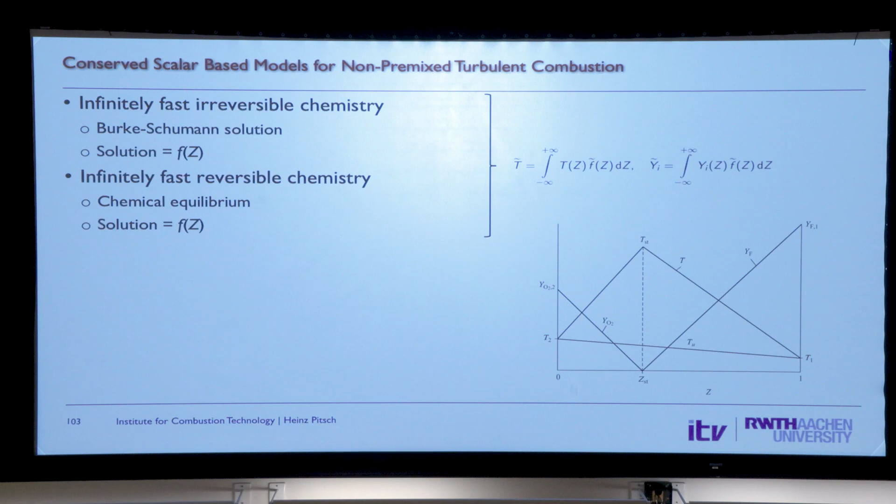Okay, so we're going to talk about models for non-premixed combustion. We just saw we have the beta PDF and we need a model for all scalars as a function of mixture fraction. One option is Burke-Schumann, but that's infinitely fast chemistry. Is there something we can do better?

That brings us to the flamelet models. The flamelet equations we had derived already. The idea is that we assume the chemistry is fast, but not infinitely fast. We don't want to formulate this for very slow chemistry. We want departures from the infinitely fast chemistry limit, but maybe the departures are not too large.

The flame is now not infinitely thin, which you would get for infinitely fast chemistry. The flame should still be thin compared to the small scales of the turbulence, or the inner layer should be thin compared to the small scales of the turbulence. That's very similar to the assumptions we made for the thin reaction zones regime for premixed flames. The inner layer of the flame still retains its laminar structure, and then we can use these laminar flamelet equations to describe this flame structure.

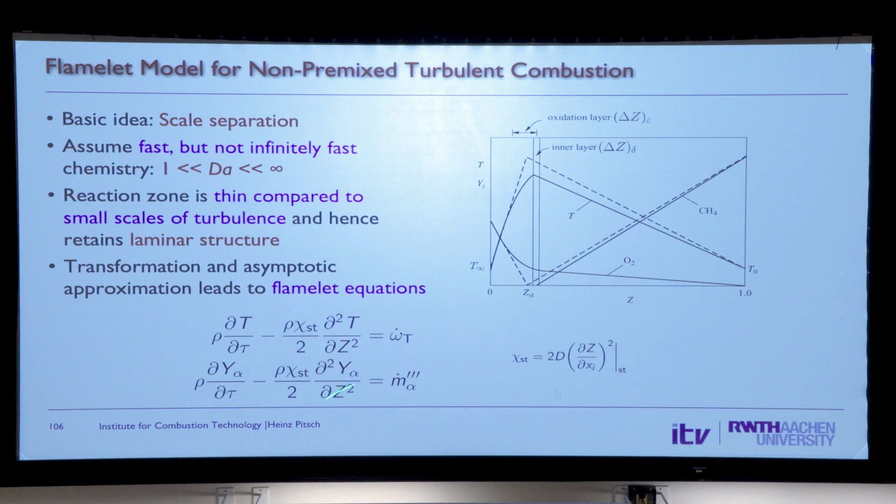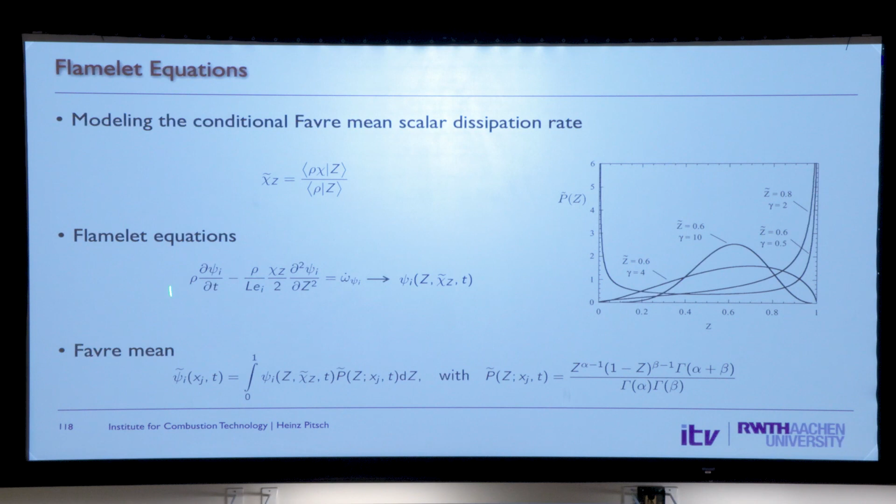Now this shows again how these are derived, but we did this already. So this is the result. Example I showed you also. Here this is the result. So these are the flamelet equations where we actually assumed the Lewis numbers are equal to 1. Here there is a Lewis number, but I want you to think of this as being equal to 1.

And then the only parameter that appears here is the scalar dissipation rate. The scalar dissipation rate can be modeled and can be locally evaluated in a flow field if we want to use this as a model in a code that simulates a turbulent non-premixed combustion case.

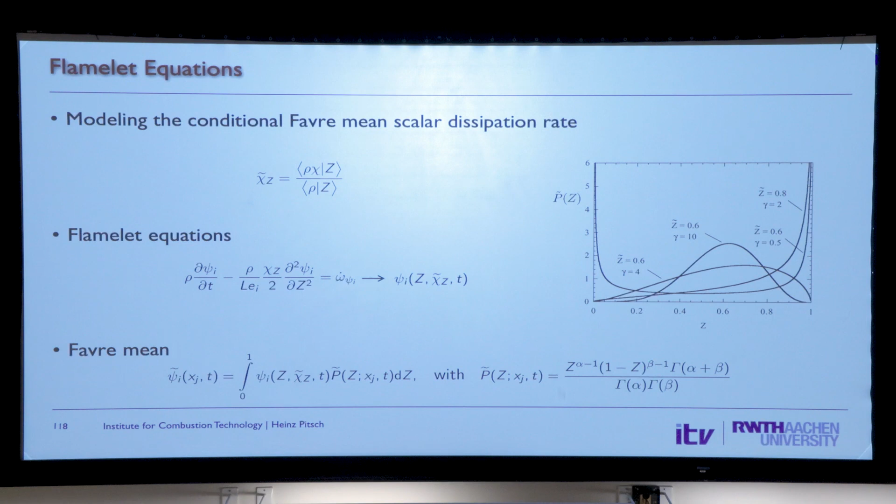So these are the equations, and we can solve these equations, and then we get psi here as a function of mixture fraction and maybe also the dissipation rate. Then we can use an expression like this to determine all mean quantities everywhere, using here the beta function.

So this is a model we have used, for example, to do simulations of unsteady combustion cases, like simulation of combustion in a diesel engine. We said earlier in a diesel engine you have the piston go up and compress just air, and then when the piston is all the way up, you inject liquid fuel, and that fuel then evaporates and ignites and so on.

This was actually my PhD thesis, developing this model for diesel engines. And the way it works, I just show it here because it's nice the way it works.

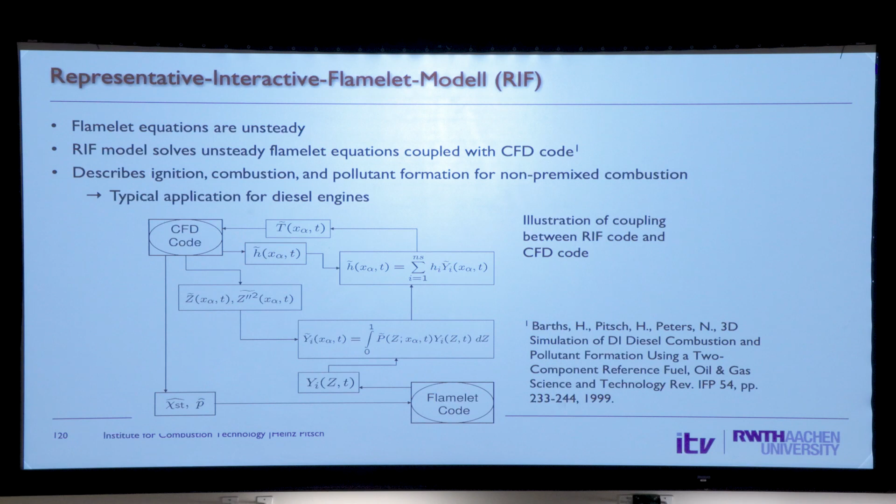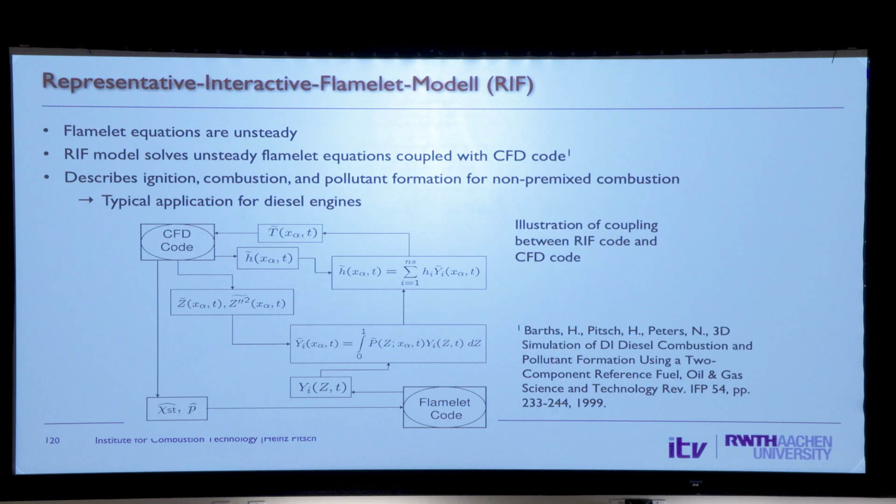We have a CFD code, and in the CFD code we have the Navier-Stokes equations, and then also we have a mixture fraction equation. We can solve these if we know the density. If I know the mean density, I can solve the Navier-Stokes equation, so I need the mean density. I'm also interested, maybe not even in the temperature, but I'm interested in pollutants also.

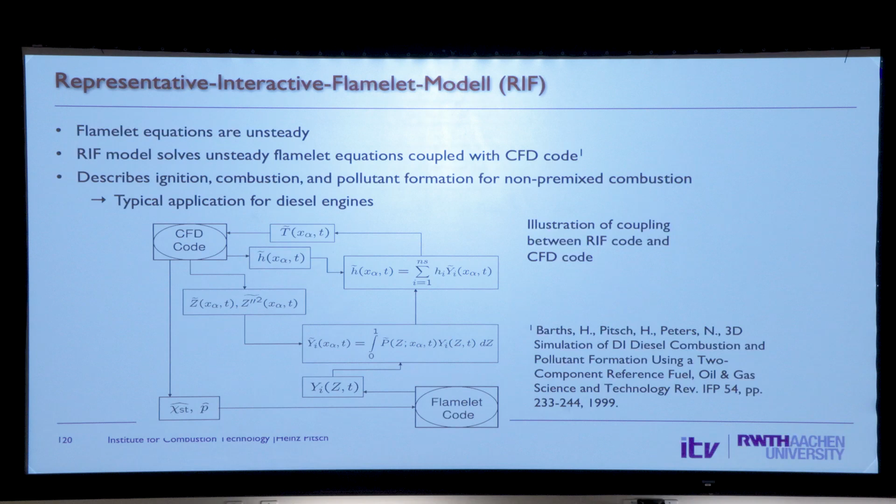So we have the CFD code. The CFD code solves the equations from n to n plus 1. And then locally we get quantities like the pressure. We have even the background pressure, which changes because the piston goes up and down, and during combustion also the mean pressure goes up.

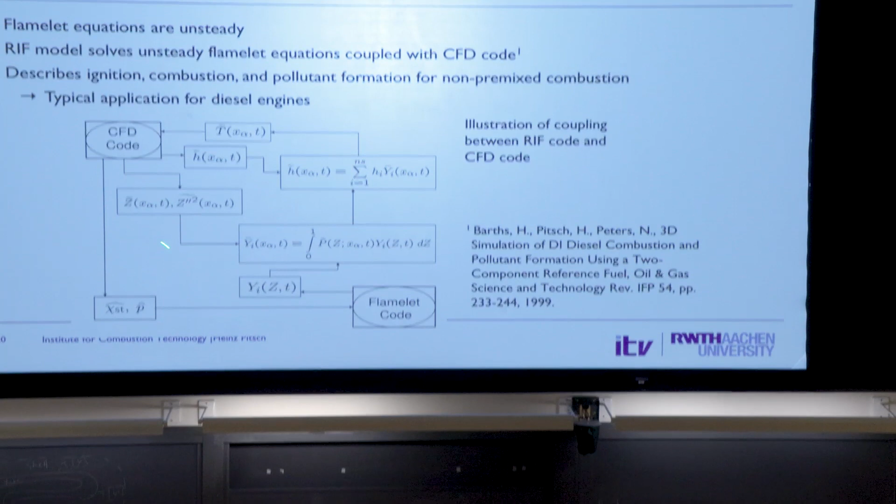And then also I can locally determine, I use a K epsilon model. I have K, I have locally the value of K epsilon, and I have the variance of mixture fraction that gives me also the dissipation rate. So I get these in each cell, and then we take an average, so that's what the hat says, of the stoichiometric dissipation rate over the entire domain, inside the cylinder. That's a little bit the trick here.

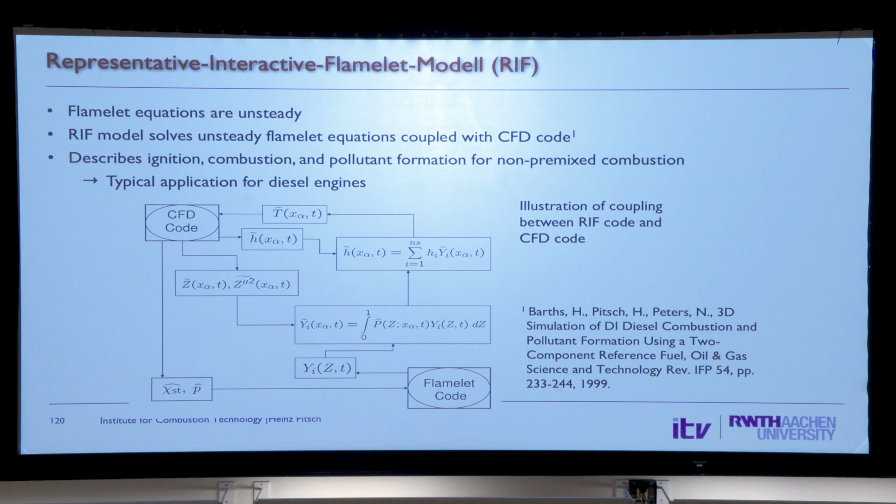And then I have a dissipation rate at time step n+1. This was solved for n to n+1. Now I can also solve the flamelet equations from n to n+1 because I know the pressure and I know the dissipation rate for that time. That gives me then the mass fractions at this time step n+1. I know the mean and the variance of the mixture fraction here from the CFD solution, and that gives me the PDF.

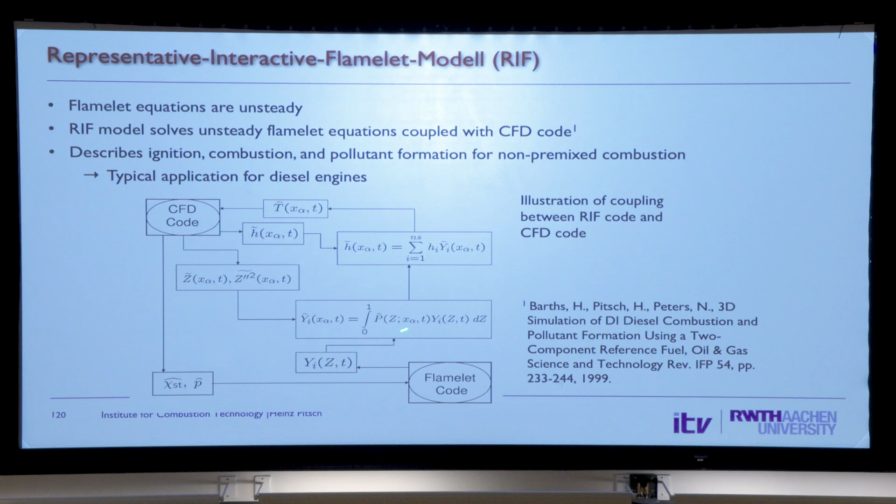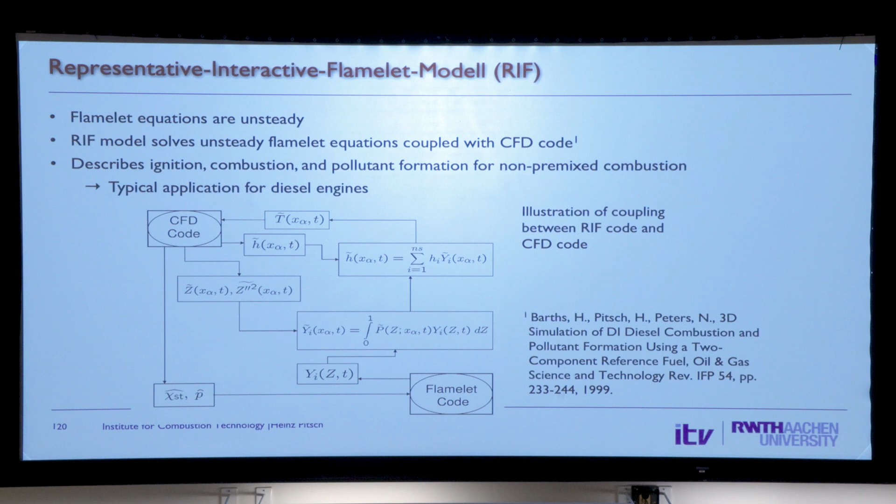I have now from the flamelet code these mass fractions, and I can get the mean quantities everywhere—here is the mean and the variance. Then we actually solve an equation for the enthalpy, and knowing the enthalpy everywhere and the mass fractions everywhere, I can determine the temperature from this, and the temperature gives me the density, and then I can solve the CFD code for the next time step.

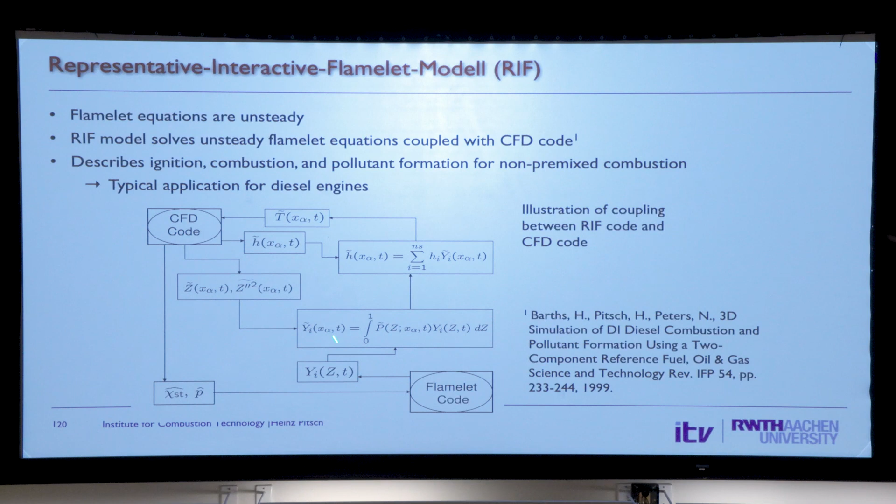So this solution always goes back and forth between these two codes, and everything is done online, which is why it is called interactive—we call this the interactive flamelet model because it's solved online.

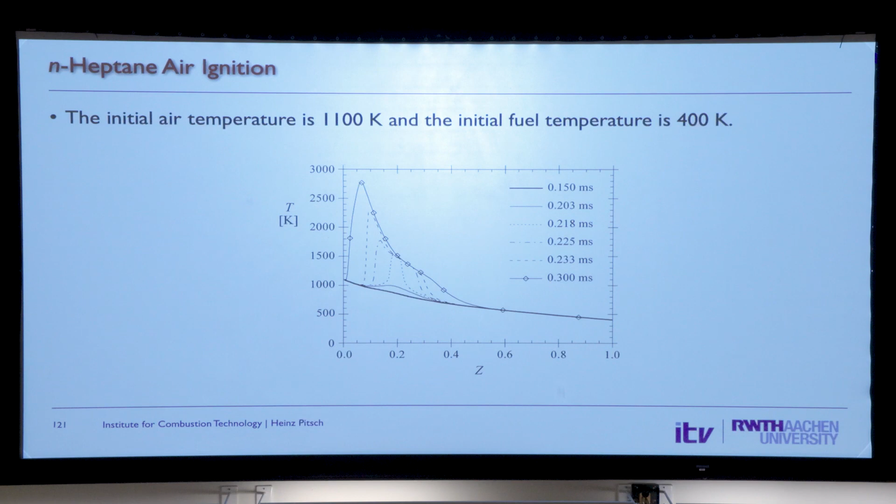And then we can use this solution here always as a function of time. This shows the results, and maybe I don't need to discuss the results very much. Actually, this shows a few more examples—so this was this model, which was developed a long time ago.

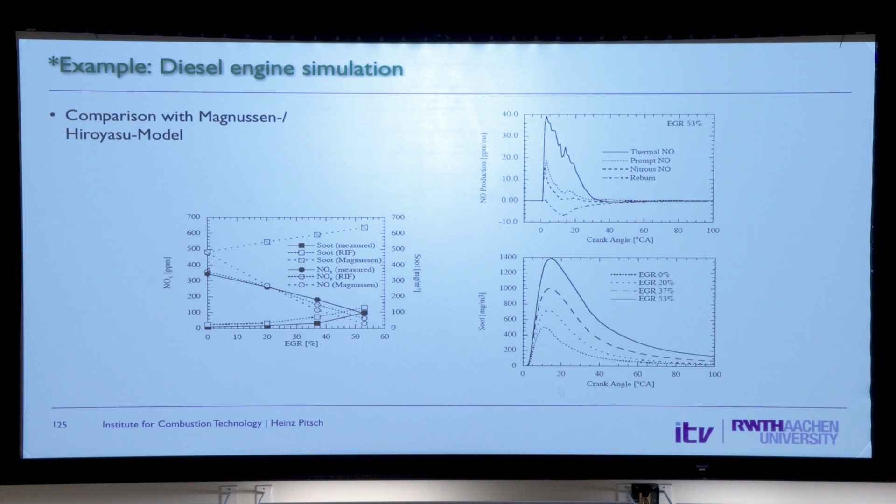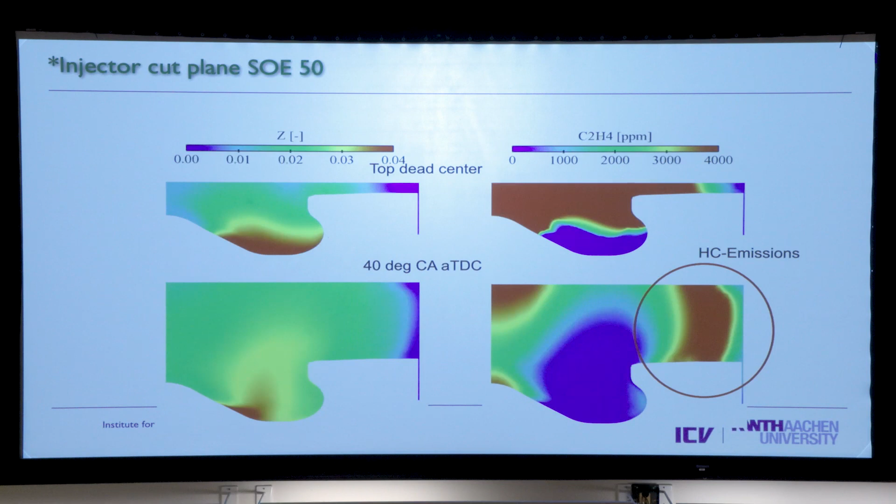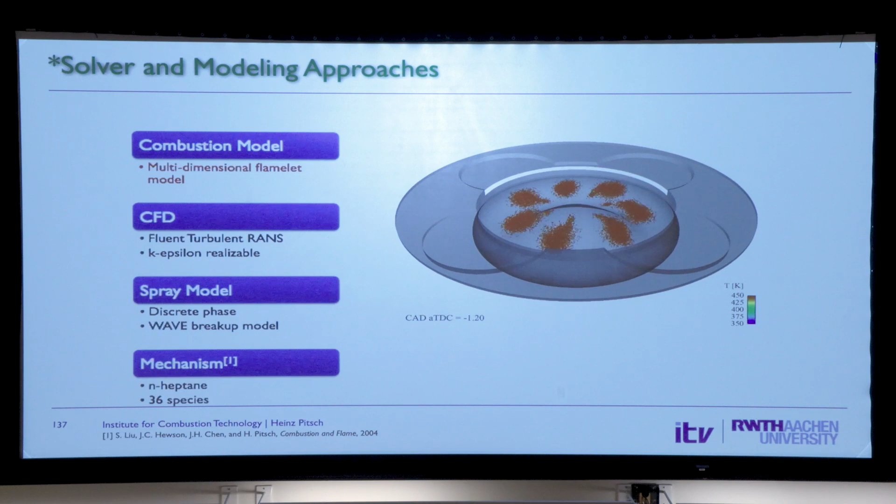And then it shows here examples of an engine that until recently we ran in our lab, and we have also extended these models, making them a little more complex for multi-feed, for multiple injections, and so on. So the examples shown here, I just show because it's a video—let's see this again. You have injection of liquid fuel, then evaporation, then a second injection, and then you get combustion.

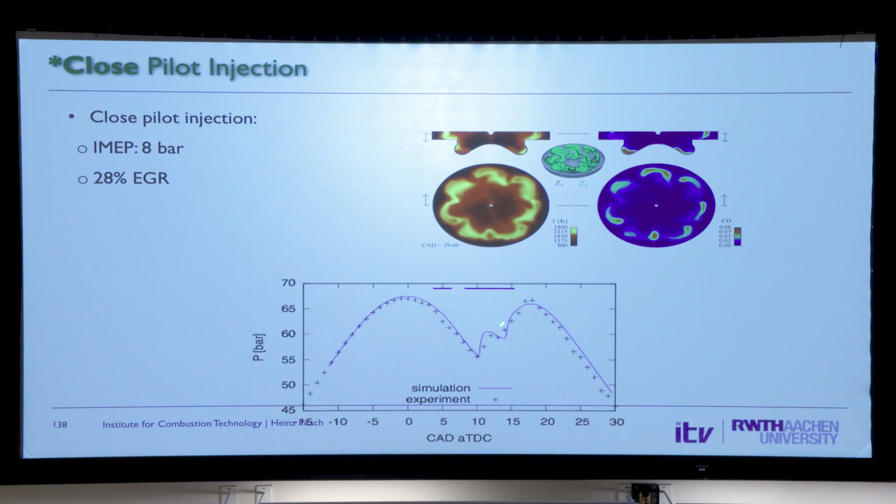And this shows the scalars here, for example CO—you see how CO proceeds. And then here's the pressure, and you see pressure goes up and down. Here's the injection, and then a little later you get ignition of this first part of the injection. Then a little later, you get ignition of the second part of the injection—that's why you get these two little humps here. So, things like this.

Okay, so that's an unsteady flamelet model. Now the flamelet model—this model—is available in, I think, most commercial codes, and can be used as a model for like a diesel engine combustion. But mostly the flamelet model was used, or is used, in a form called a steady flamelet model. That makes for a very nice model that can often be used for non-premixed combustion simulations.

Here again we start with a flamelet equation for temperature and mass fraction, and then we assume the flame structure is in steady state. What does that mean? There are parameters—this is a time-dependent equation, and it will always try to go to a stationary state, right? It will always try to go to equilibrium, and it will reach that equilibrium at some point, and then nothing changes anymore, unless you change a parameter.

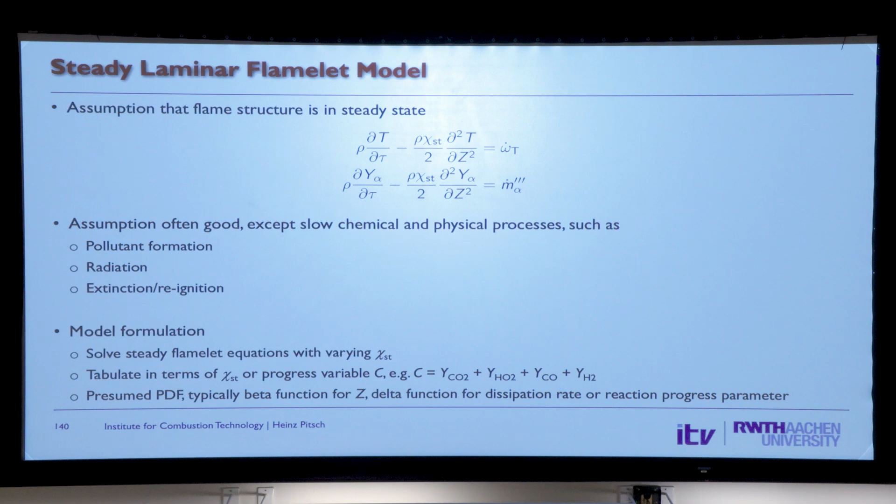So you change the dissipation rate, or you change the pressure—these are parameters that influence this equation. But let's say we are interested in a stationary turbulent jet flame. It's ambient pressure, so the pressure doesn't change.

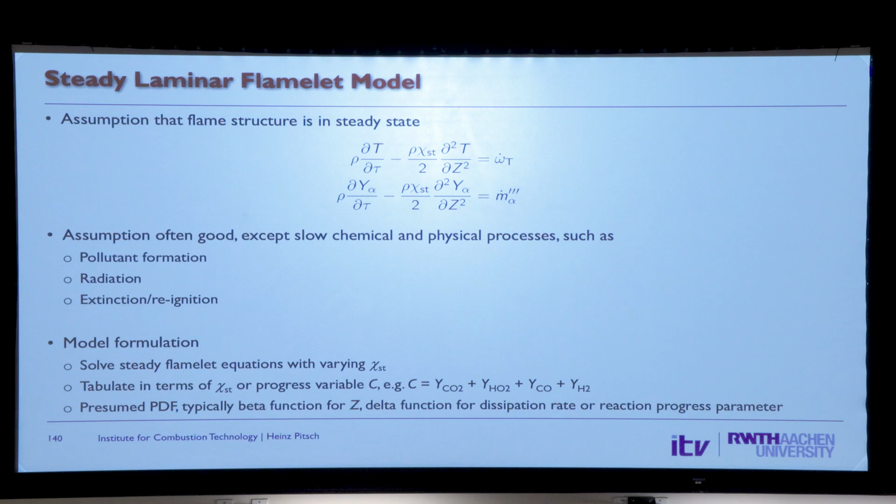And the dissipation rate changes all the time—it changes when you go downstream; it's actually very high close to the nozzle because it reflects the local gradients, which are very high close to the nozzle, and they decay strongly downstream. In the jet, the dissipation rate on the center line goes with x to the minus 4, and along stoichiometric mixture it goes with x to the minus 2. So it strongly decays when you go downstream, and that changes here.

But still we say the equilibrium is reached fast compared with the changes of the parameter, and so the flame structure is in steady state. That makes for a very nice model, because if the time dependence here is zero, and the pressure is constant, then the dissipation rate is the only parameter that influences the solution.

What we do is solve these equations for any possible value of dissipation rate, and we get a solution of temperature and mass fraction as a function of dissipation rate and mixture fraction, and we put that in the table. Doing a simulation, we just look up the table and use the presumed beta PDF.

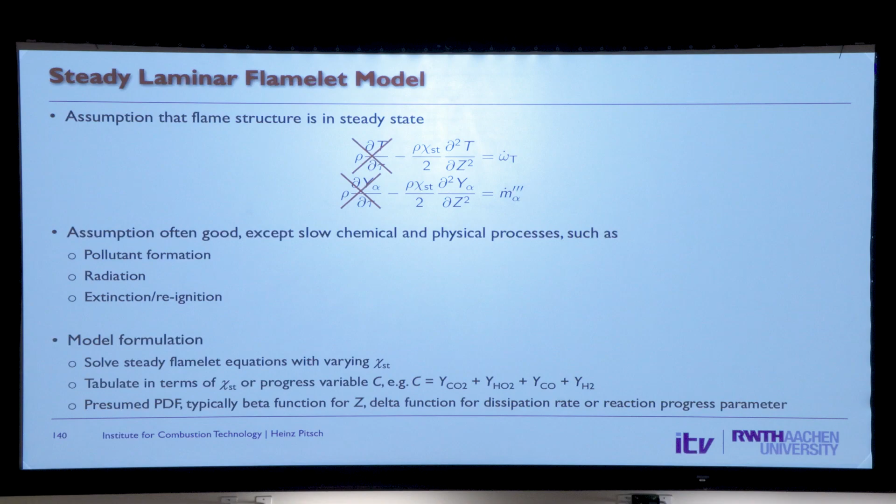The tabulation can be done in terms of mixture fraction and dissipation rate, but instead of dissipation rate, sometimes we introduce a progress variable, and then it's done in terms of mixture fraction and progress variable. Now you have the solution, let's say temperature in terms of mixture fraction and progress variable.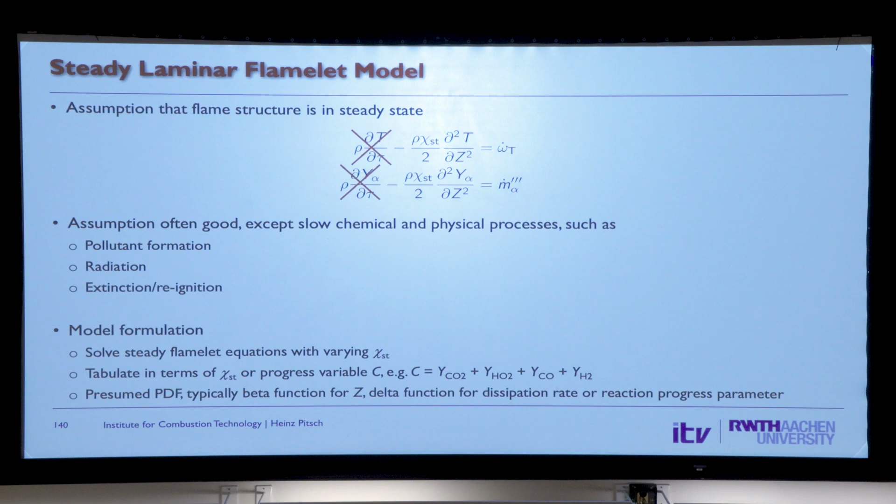I know the beta PDF depends only on the mean and the variance of mixture fraction. So I can do this integration of y of z times PDF of z, which gives me the mean, for all possible combinations of mean and variance of mixture fraction. Then I get the mean as a function of the mean mixture fraction, the mixture fraction variance, and the dissipation rate.

That gives me a three-dimensional table, and in the simulation, in one cell, I would look at what is the dissipation rate, or stoichiometric dissipation rate, what's the mean and variance of the mixture fraction, and go into my table to look up the mean density, the mean temperature, and whatever else.

So that's the steady flamelet model, relatively simple and also available in many codes. The drawback is you need to always generate this flamelet table first, but once that is done, one can do these simulations.

This here is an example, a simulation we did a long time ago - the bluff body stabilized flame. The white surface here is just a solid body, and you have air outside, and the little black spot in the center is the fuel nozzle.

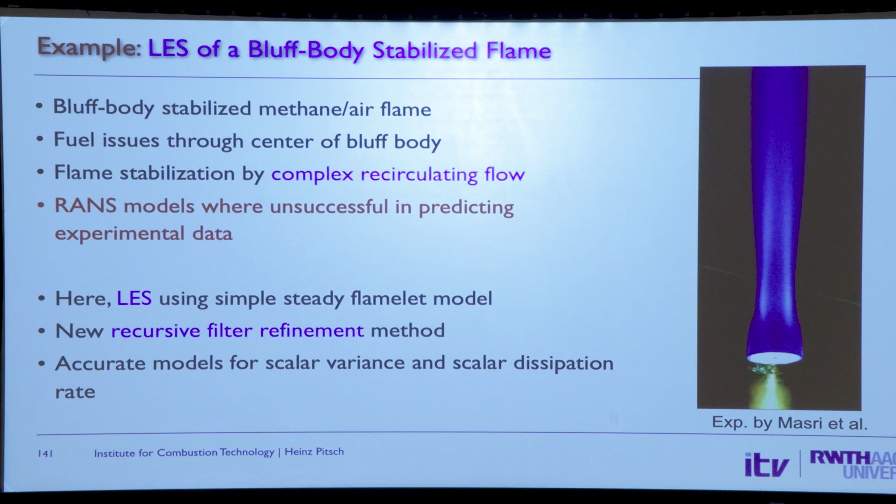So you get a recirculation region close to the flame, and this is how the simulation looks like. You see this recirculation here. This one also we had in blue and red, and you could see it in 3D.

This compares temperature and CO close to the nozzle and far downstream. Close to the nozzle means in this recirculation zone, and then far downstream. You see it's very good.

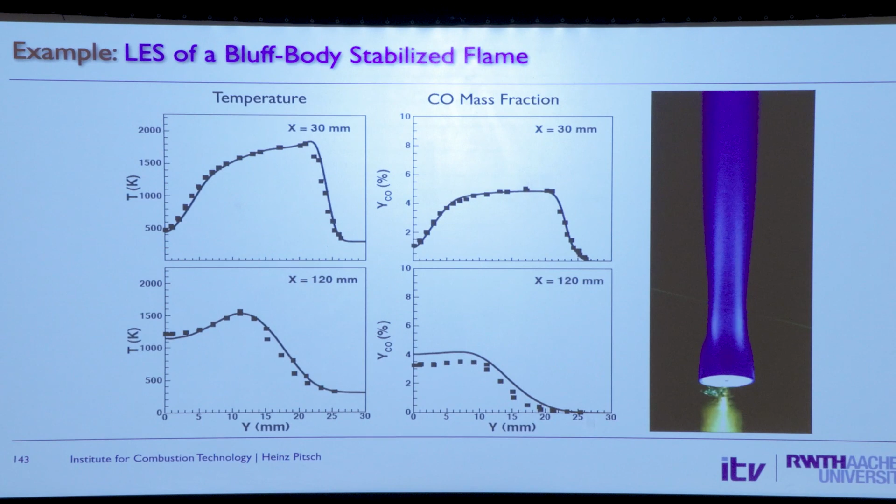At the time, it was interesting - a lot of people tried to do simulations for this, and most models either predict what happens close to the nozzle or what happens downstream, but not both at the same time. This predicts both. Why? Because it was LES, and LES is much better capable of describing these more complex flow physics.

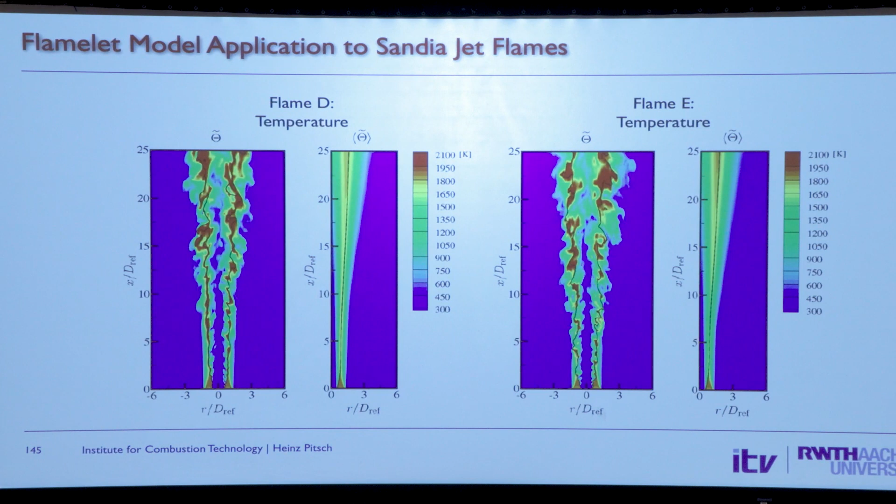We also looked at cases that have local extinction. I said this is not really meant for cases where you have local extinction, but we have extended these models in a way where this is then possible.

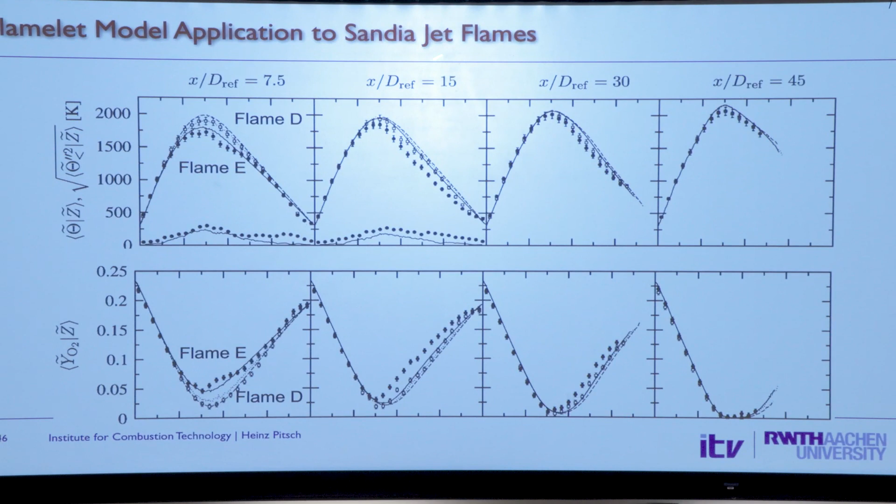You see here, these are the Sandia jet flames. They're very famous, very often used for validation. Here you have oxygen mass fraction, and you have air on this side, but the fuel also has some oxygen.

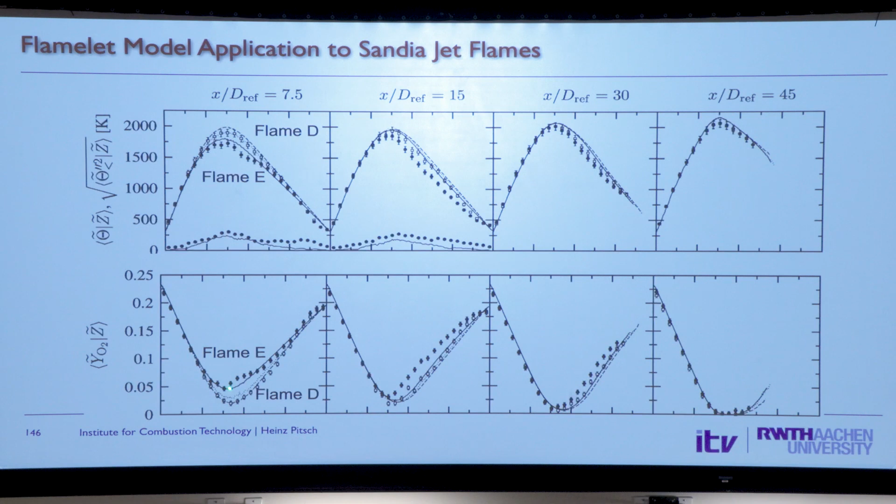This is why you have oxygen on both sides, and actually at stoichiometric it should go to 0. The reason it's not 0 is because of local extinction events, which leave over some of the oxygen - this is close to the nozzle. If you go downstream, at some point the oxygen is fully consumed.

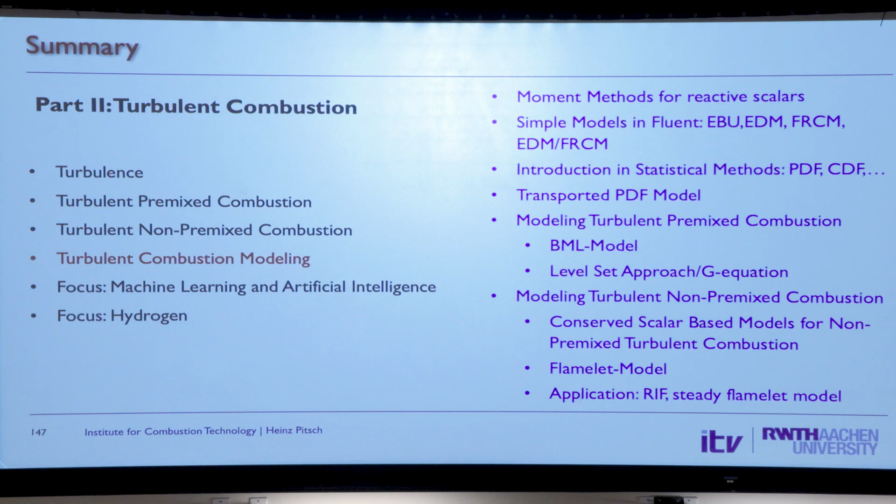These are just a few examples for applications of these models. What I showed you now is just models for the simplest cases. There are more complex cases where the simple version of the model is not applicable, but people have come up with ways to deal with these also.

The nice thing about a flamelet model is it's a true multi-scale model. True multi-scale means it starts really from the local flame structure - it looks at what the local flame structure is, and then averages over the local flame structures, rather than first averaging and then getting an equation for the mean. Because it's a multi-scale model, it can really tell you the difference between local states - the non-linearity that you get for local states.

So, for example, I have a certain local dissipation rate, and everything burns fine, and then I increase this dissipation rate a little bit, and it extinguishes. That is very hard to describe in a mean sense if you just have a moment equation, but it's much easier to describe with a multi-scale model. The multi-scale model then has the disadvantage that it's sometimes a little hard to formulate for complex cases. So that's the disadvantage of this model.

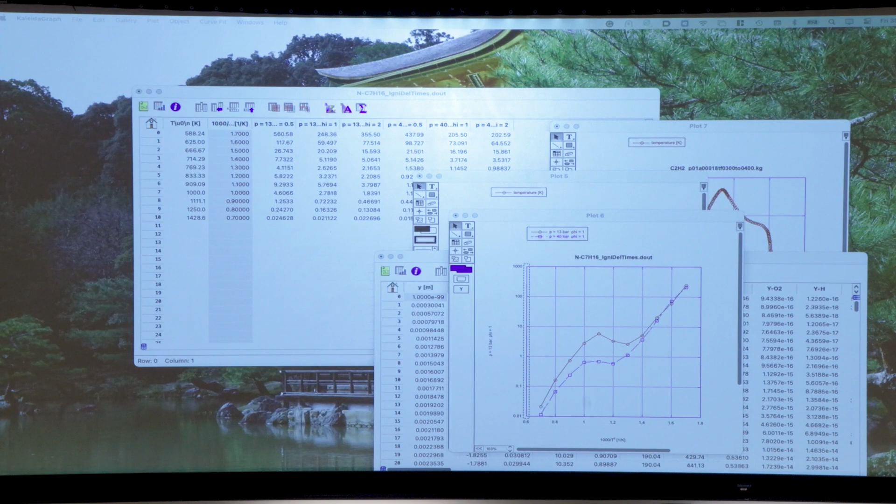Okay, so let's go to the next topic. Now we have two, I call these focus topics. One is on machine learning, and the other one is on hydrogen, as I mentioned. Okay, so let's start with machine learning.

Maybe I'll skip over some of these things because they're not so important, or maybe a little too much detail. But anyway, people talk about artificial intelligence, machine learning, data-driven approaches, and so on. It's not all the same.

Here you see artificial intelligence is a very wide field, and machine learning is one subset of this, where we try to learn with experience. We try to use data for the machine to learn something, and of course more data typically improves these algorithms. Examples for machine learning are often used here for recognition, language processing, and so on. People use it for image recognition, and people use it for ChatGPT, you all know, for language, which is a language model. So they're very, very smart algorithms which just learn from data.

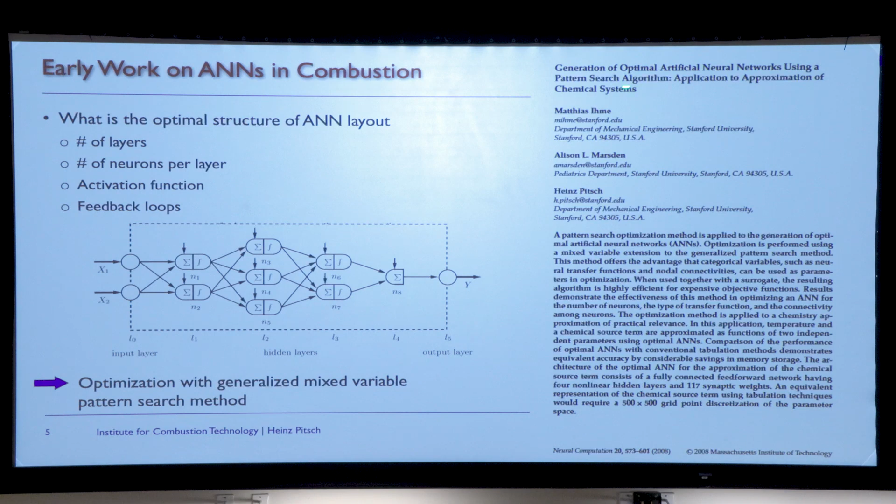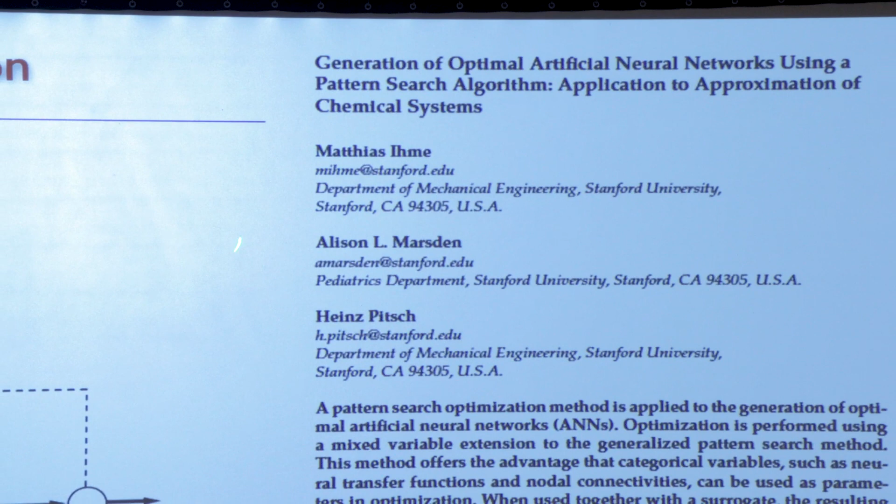Now, is this new? No, it's not new. This is a paper that we published with my former student, Matthias Ihme, and with Alison Marsden - interestingly, I just realized both of them are now professors at Stanford. So doing machine learning early on gets you somewhere somehow. This is a paper we published 15 years ago, a long time ago, and we're not the only ones who did machine learning, artificial neural networks at the time.

So what we did in this paper is address a question you should ask - I showed you how a neural network looks like, but how many layers should I use? How many neurons should I use per layer? What connectivity should I use? All these are questions. The weights are determined in the training, that's really what you determine during the training, but what should be the structure of this?

So we developed an optimization algorithm that optimizes the structure of this to give you the best performance of the network. Of course now it's very well known how to do this.

You see here, for example, temperature: one is using a flamelet table, here a very fine flamelet table, very accurate, shown in blue, and the ANN is the red line. So it wasn't very accurate.

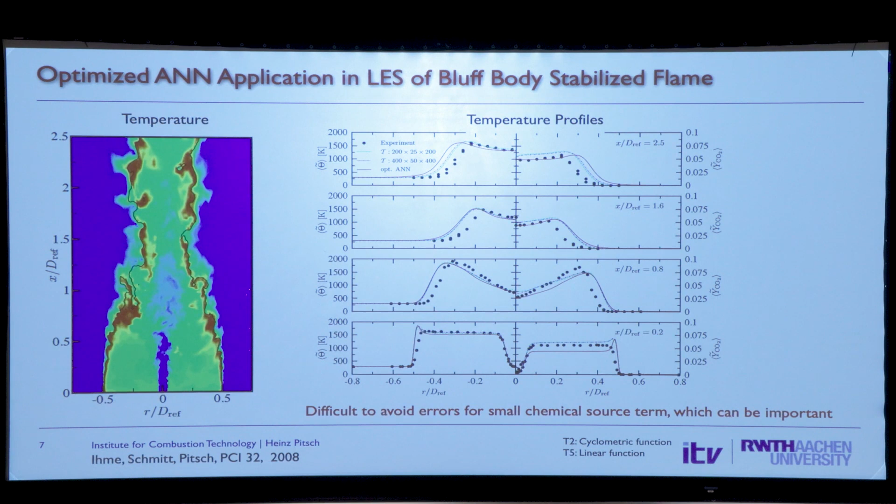We analyzed this and figured out why. It turned out sometimes the chemical source term is really, really small, and then the network says this is not very important. But it is sometimes very important, even very small source terms. So we couldn't figure out how to make this very accurate.

So that's why we gave up at the time. We thought it's not very useful.

But now, why is artificial intelligence, or these neural networks, becoming more popular? Because now so many people are interested in this, and companies are interested in this, and develop these toolboxes and techniques that you can use.

For example, everything at that time, Matthias had to code up manually. Now you just use Keras or whatever toolbox, and it's 5 lines and you get your network. It's very, very easy to do this now.

But what's even more important is that things like overfitting, or how to get networks with really good accuracy - there's a procedure now where we know exactly how to do this, and there are special tools or special tricks that we didn't know at the time, we didn't have at the time. Which now everyone knows, so it's much easier here.

For example, it doesn't say it here, but these dropout layers or regularization, these techniques that we use now, we didn't have at the time.

And then also, of course, now more complex ways have come out: convolutional networks, generative networks, reinforcement learning, all of this. People are looking at different techniques and trying to make something out of it.

There are certain ways to avoid overfitting. One is these dropout layers, where during training there's a certain probability that you don't use a neuron at all. So the network has to give you good results with or without this neuron. Usually when the network overfits, one neuron becomes responsible for one data point, and another neuron for another data point. By eliminating some neurons during training, there's not one neuron responsible for one data point, which leads to better training.

Then there's regularization. If the network wants to assign one neuron to one data point, it typically leads to very large weights for these neurons. Regularization means the weights can't be very, very large. There's a regularization term that keeps them the same size, or penalizes large weights, and that also helps. So these are just two examples of techniques that help avoid overfitting. There are many others also.

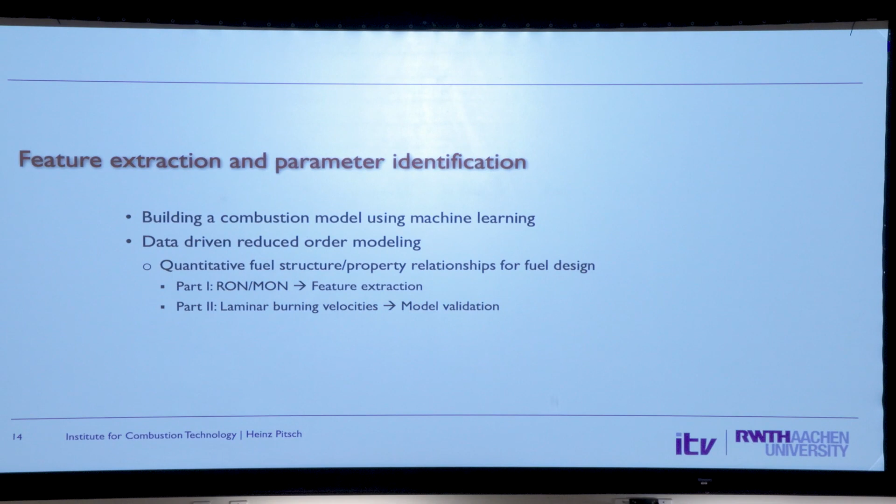This means it's very important to choose the right parameters as input. That's what we call feature extraction. The question is, what are the correct input parameters? And that, in modeling, is of course always a big issue.

This is a technique we've been using for a long time, which has nothing to do, in a way, with artificial neural networks - a technique to do feature extraction. We call this the optimal estimator technique. It's something we always use in modeling, where we have data and try to understand what parameters to use for a model. Now what is modeling? We said this yesterday - modeling means expressing unknown quantities in terms of known quantities.

The known quantities are the inputs in a model, and the model should give me as output some other quantity I need to know. Modeling has two steps: the first is I need to choose the parameters I use in my model, and the second is, once I have the parameters, what's the functional form. And here's an example.

We said eddy viscosity - this is a quantity we need to know - in LES, the subfilter Reynolds stress. And this is the eddy viscosity model, where we have an eddy viscosity and the strain tensor. Then the Smagorinsky model says the eddy viscosity is given from the strain rate, or the magnitude of the rate of strain tensor.

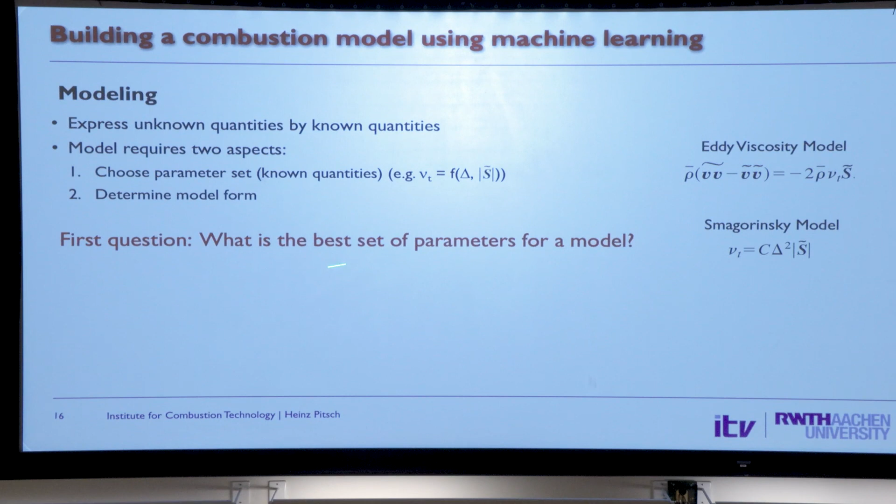So what are the input parameters in this particular case? They are the elements of the strain tensor - so I have 6 input parameters here. This doesn't come independent of it. And the question is, are these the right input parameters? Instead of the rate of strain, I could also use kinetic energy, or something else. So that's the question - what's the best set of parameters for a model? And that's what we want to find out using this optimal estimator technique.

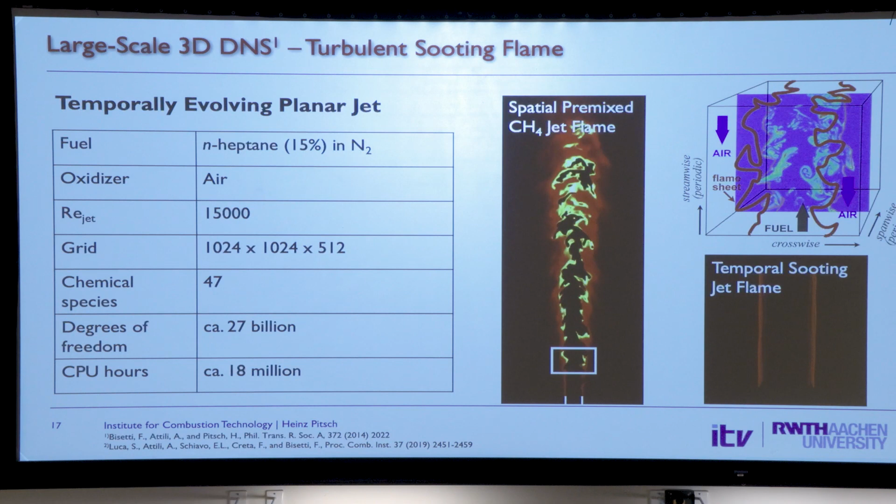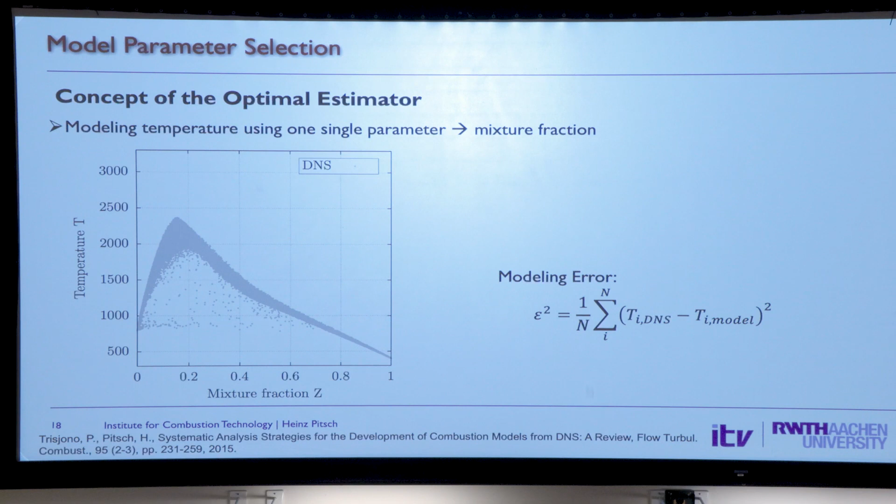This shows an example. We have a data set - doesn't matter what the data set is. We're interested here in soot formation, using a temporal sooting jet flame, and you see some parameters here, but again it doesn't really matter. Before we look at soot, we look at just temperature. This shows, from the DNS, the temperature at each point as a function of mixture fraction - for each point we just take the temperature and mixture fraction and plot it in this 2-dimensional space.

Now we want to develop a model where we have only one parameter, and that parameter here is mixture fraction. I can think of different ways to do this - the first one...

I can think of different ways to do this, and then assess them by defining a modeling error, which is just the L2 norm between the DNS and the model. So I can think of different models. The first one is Burke-Schumann, which we did before. It looks like this, and it's not totally wrong—it has the right behavior, but quantitatively it's not very good. If I evaluate this model error, I get a mean error of 180 Kelvin.

A second model I can think of is to take a flamelet, but only one flamelet with a scalar dissipation rate of 10 per second. That's the red line here, and you see this is much better—you visually see it's much better. If I determine the error again, it's only 50 Kelvin.

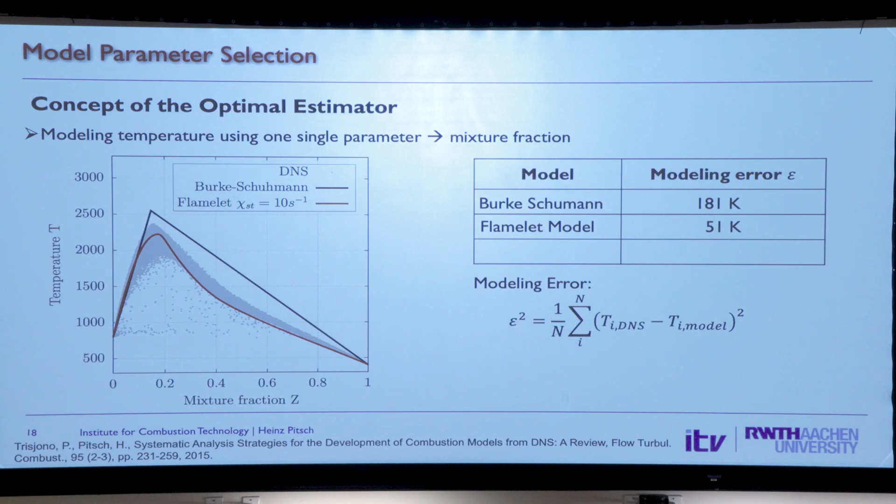Then I could ask: what's the best possible model I could determine given that data? For this set of data, what is the best possible model? It's easy—I have epsilon as this right-hand side, and if we want to know the best possible model, it's just a minimization of the error.

You differentiate the epsilon by the T-model and set that equal to zero. That gives you a minimum of the error. If you do this for a given value of mixture fraction, you'll see this is the conditional mean—for a given mixture fraction value, that's the minimum error you can have. Just take the derivative of this with respect to t-model, set it equal to zero, and it gives you exactly the best model with the lowest error. The best model with the lowest error is the conditional mean, and if you look at the conditional mean here, it gives you this.

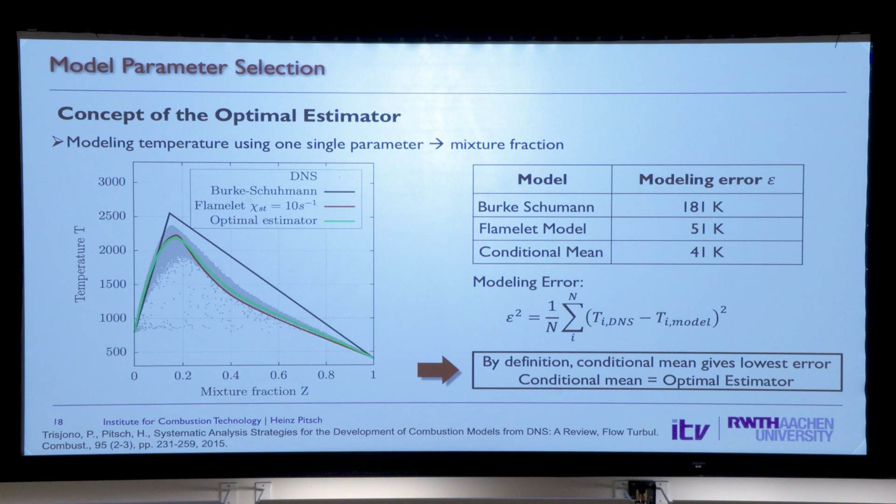That's what we call the optimal estimator. The optimal estimator is just a conditional mean, and whatever I do—if I have only this one parameter, mixture fraction—if I fix this parameter, that's the minimum error I can have. It cannot get better. I've just shown this is the minimum.

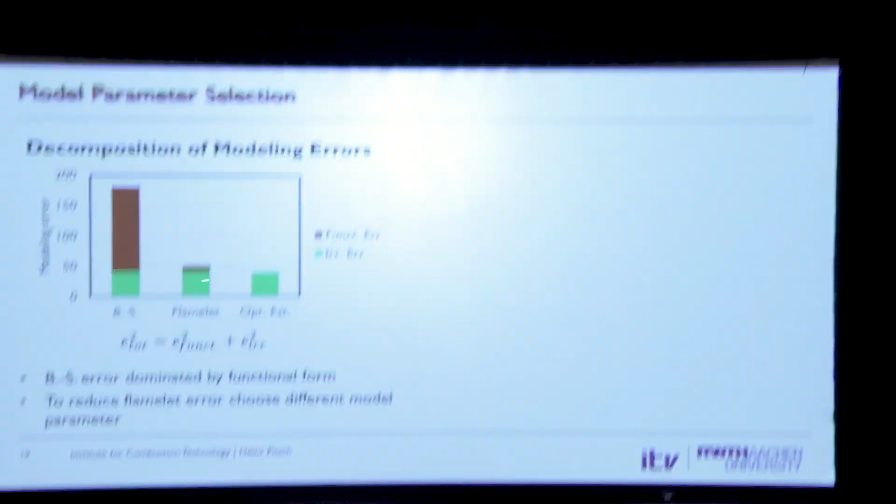So I can look at the error again: Burke-Schumann, Flamelet, optimal estimator. The optimal estimator has a certain error, and it cannot be smaller than this. So the Flamelet model had an error of 50 Kelvin, but 40 of this was just from picking the parameter, and the functional form only accounts for a little bit—it's almost the best I can do with this parameter. With Burke-Schumann, most of the error comes from the functional form.

That puts you in a position to ask what are the best parameters. Because no matter what the functional form is—I don't even know what the model is—if I just say mixture fraction is my parameter, you cannot get better than 40 Kelvin. So now I can test different parameters and see what's the smallest error I could get with this set of parameters.

For example, if I have no parameter, I just use a constant temperature as my model—this is the optimal estimator, and we call this the irreducible error. Once you pick the parameter, you cannot reduce the error any further. That was 40 if I just have mixture fraction. Let's say I use the local velocity as a parameter instead—that's stupid, but it's almost like having no parameter at all.

But if I use the mixture fraction and dissipation rate, it gets better. And if I also add velocity, it does not get better. So if this is the accuracy I want, I need to use mixture fraction and dissipation rate. If I'm fine with 40, I don't even need the dissipation rate.

So for any model, if you have a data set, you can do this analysis to determine the irreducible error for many different parameter sets, and then see which one is low enough.

We did this here for soot. This is the PDF of soot in these little areas. We want to model this PDF, describing it with the mean, which is the first moment, or the first and second moment, giving the variance, or the third moment. This is a skewed PDF, so you need some skewness—the third moment should help, then fourth, fifth moment, and so on. That's what's shown here.

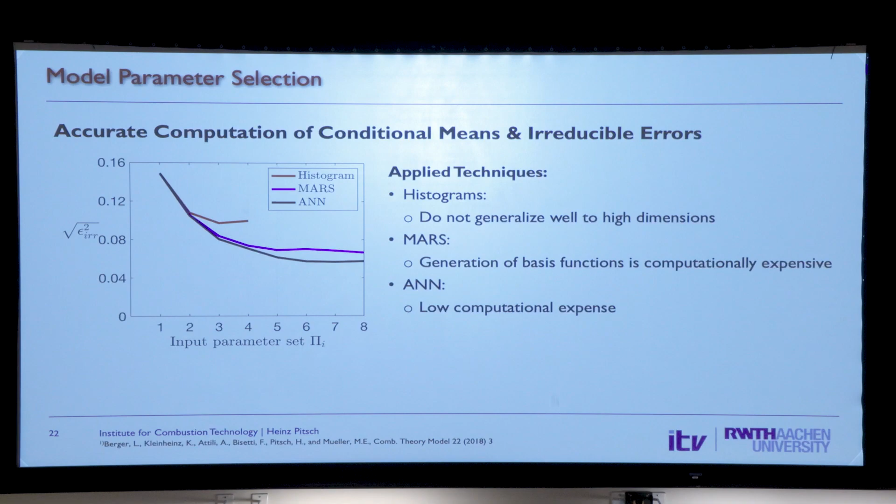I'll skip over this. The two lessons we learned here: what's interesting is this—I would have naively thought that if I have a PDF and I have the first moment, the second moment, the third, all the way to infinite moments, I can exactly determine the PDF. It's not true. It depends on what moments you have. I didn't know this until we ran into this problem.

The second lesson we learned is the optimal estimator is the conditional mean, and evaluating the conditional mean in high dimensions is difficult. In the temperature example earlier, with only one parameter, it's a one-dimensional space. With two parameters, it's a two-dimensional space, and I need to do the conditional average in 2 dimensions. With 3, 4, 5 parameters, I have a 5-dimensional space. Even with a big DNS with millions of data points, when we do binning, we only get about 20 points per bin in 4 dimensions, which means it's not very accurate, and that creates a problem.

So we developed a technique where we use an artificial neural network to represent the conditional mean, and that was much better. So that's one example of a data-driven technique that we use very often in modeling, especially when we have DNS data.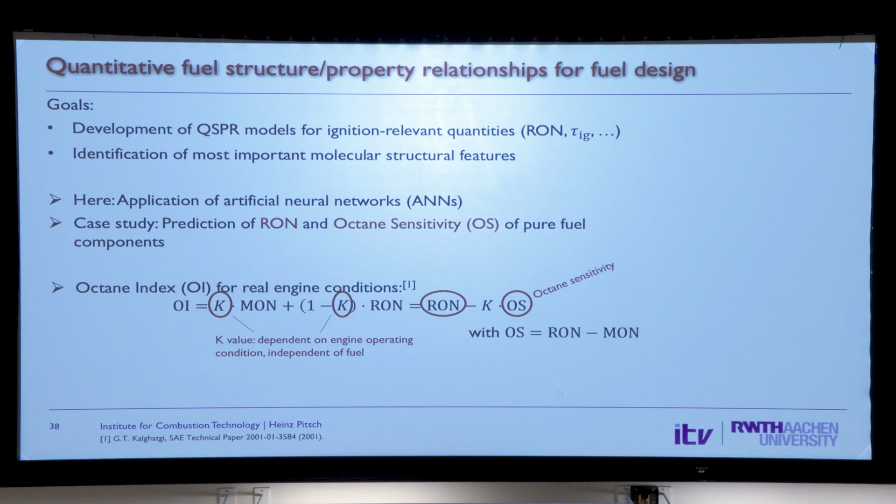Here are a few examples of artificial neural networks that we used in supervised learning to predict fuel properties we're interested in. For example, this is a model that takes the structure of a molecule as input and predicts the octane number. Why do we do this? Because we want to design new fuels with particularly high octane numbers. Having a model that predicts the octane number from fuel structure, we can invert this and get a molecule that has a particularly high octane number. We call this QSPR—quantitative fuel structure property relationship.

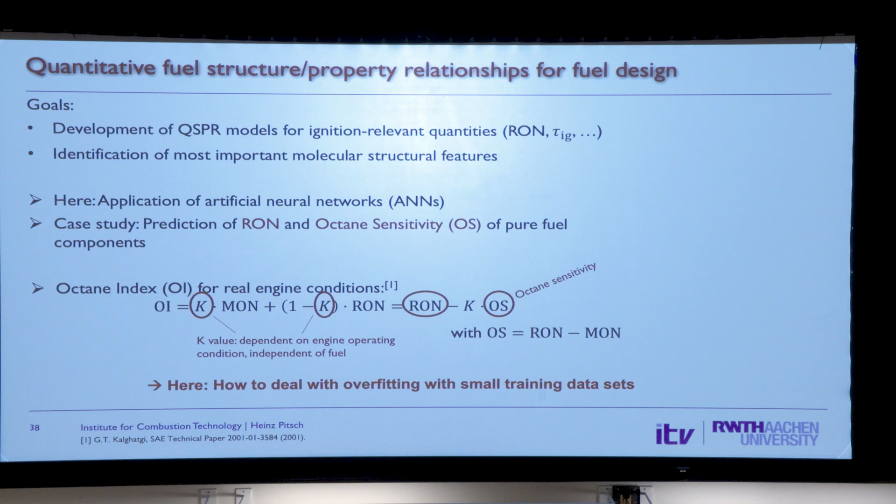QSPR—in chemistry this is a big thing, and people do this in other fields all the time. So that's simple: I have a database with RON, research octane number, and motor octane number, and what I need to do is define a way to represent the fuel.

We use the so-called structural group method here, the Joback groups, where if I have a molecule like this, I just say this is a primary carbon, this is a secondary carbon, and this is a tertiary carbon. If you have carbons in a ring, you define structural groups, and we just say this is how the molecule is made up.

Now the big problem—I can use these as input parameters, I have the RON and MON, and I can train a network, that's it. The big problem here is, compared to Google, we are always data deprived. For these combustion properties, you might have only 5 fuels where you know the value, or maybe 100, but that's usually not enough to do easy training. So the big problem we have compared with other data-driven approaches is that we usually don't have enough data.

So you see, this is what we have: 144 data points, not very much, right? So what we do then is use a technique called k-fold cross-validation. That's what we use in training. Now, the first thing you need to do when you train a network—I have 144 data points.

I would usually not use all 144 data points to train the network, because then I don't know if the result is any good.

It might be totally overfitting the data or not. So what we usually do is we define a training set and a validation set. I take my whole data and take maybe 70% for training, and when I'm done, I use the remaining 30% to see if the model is good or not.

But if I have only 144 data points, that's difficult, right? So we use a technique called k-fold cross-validation, where we take the whole data set and divide it into k individual batches. Let's say we have 10 batches of data, each with 14 data points. We take the first batch out and train with the 9 remaining, and see what the error is. Then we take the second batch out and test with the remaining, and so on. We do this k times, and that gives us an idea.

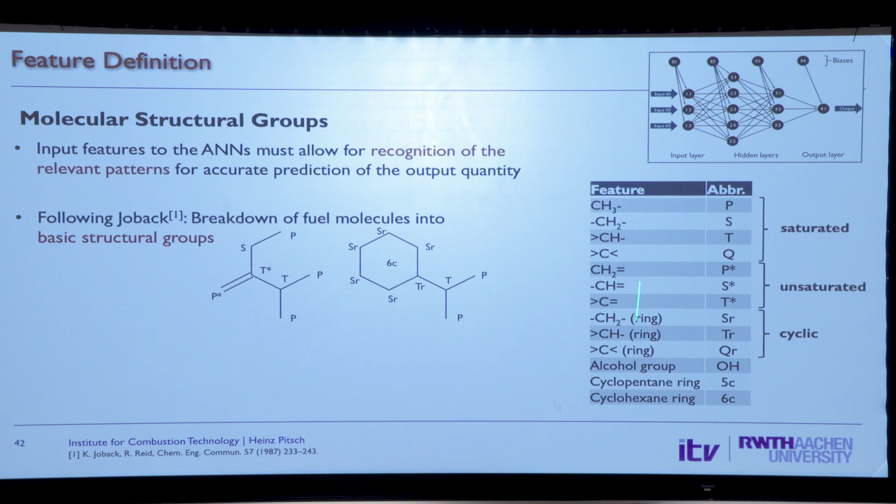These are the groups that we have defined, like 15 different ones. And then we can do the training. We have 15 different parameters as input, but it turns out they're not really all independent. Some of them might be dependent on each other, and if two parameters you use as input depend on each other, that's a problem again in terms of overfitting.

So what we do is pick one parameter out of the 15, train the network with that, and see what the error is. We do that for all 15 parameters, and look at what is the best one. The best one here in this case was the longest saturated carbon chain length - just a number describing the molecule. And then we take this as our first parameter, fixed.

Now we test this first parameter with a second parameter, again for each single one. The second one here is called the branching descriptor. We go up like this and decide on more and more parameters. What's interesting is for the octane sensitivity versus octane number, the first parameter is actually the same, but the second best parameter is already different between the two. So even though these two quantities are very strongly related, you need different models.

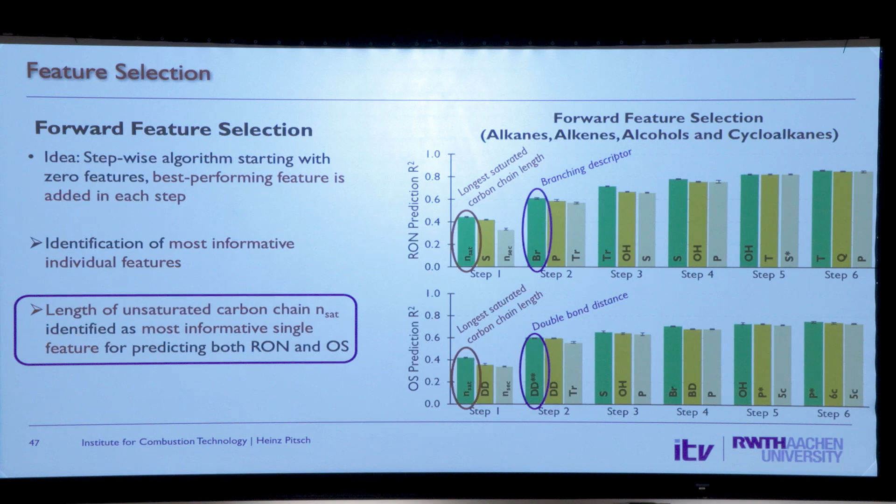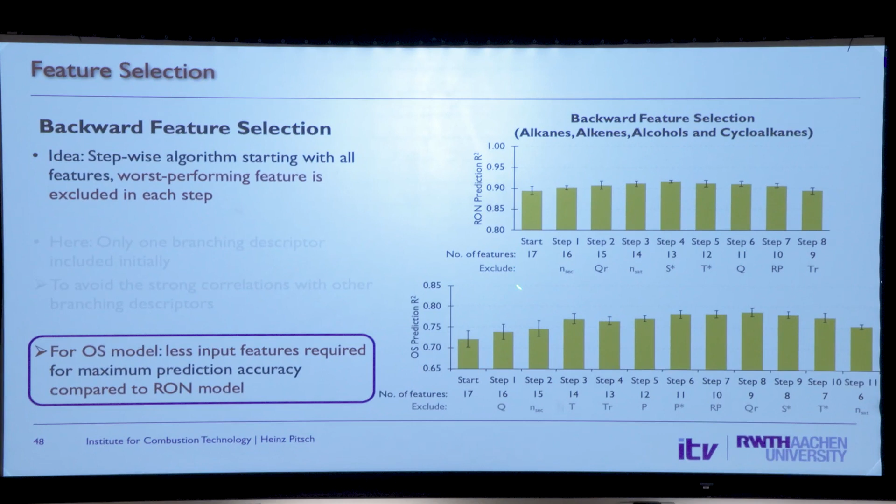You could also say, rather than building up from 1 parameter, 2 parameters, and so on, let's just take all parameters and see what I get, then take 1 parameter out. What happens then? You would think if I take one parameter out, the model should get worse, right? But the opposite is the case. This is shown here: let's start with 17 parameters, and I get a certain uncertainty.

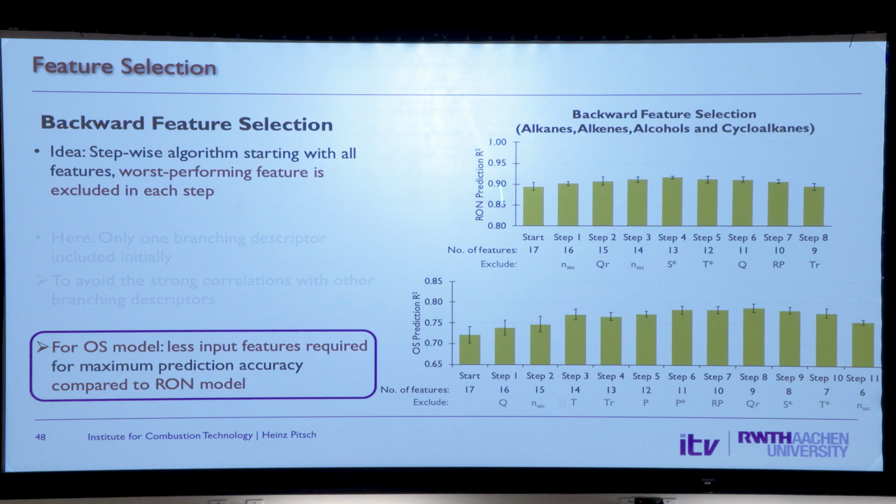I take one parameter out, and the model - this is the predictivity, so the higher this value the better - gets more accurate. What happened? If I have too many parameters, I go into overfitting again, meaning as soon as I want to predict something not in my training data set, I get a bad result. So you see, I take 2, 3, and 4 parameters out and it gets better and better, and only then, at some point, it gets worse again.

By the way, once we decided on exactly how to do all these things - how long we need to train, how the structure of the networks is - then we take all the data and just train the network once, because the uncertainty was determined beforehand by the k-fold cross-validation.

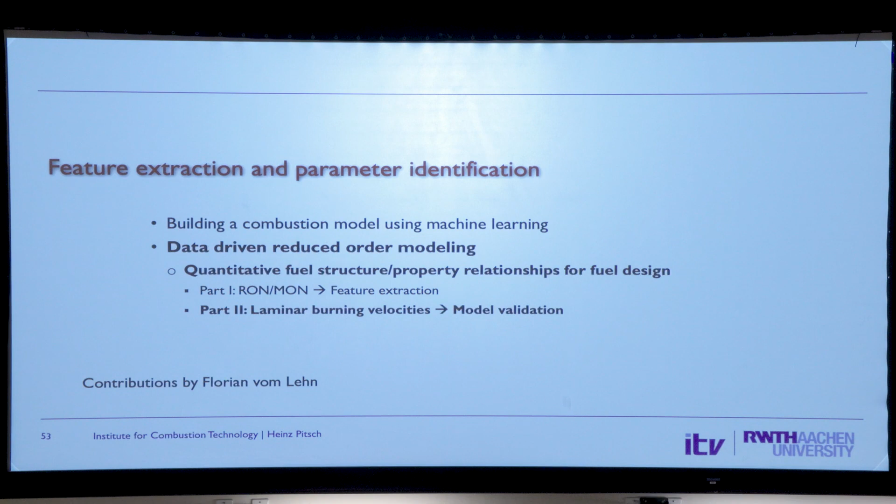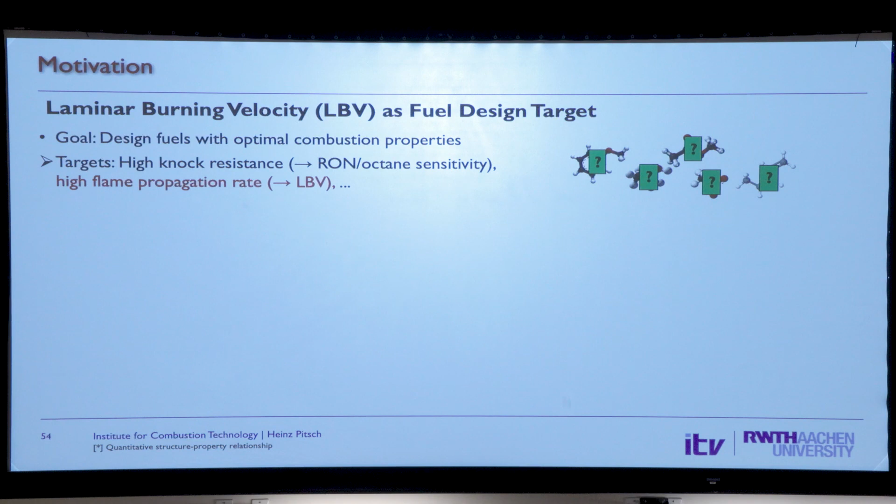Okay, so that is one. Here's a second example, for the burning velocity, and that's very similar. Only there's one other interesting aspect here that I want to point out.

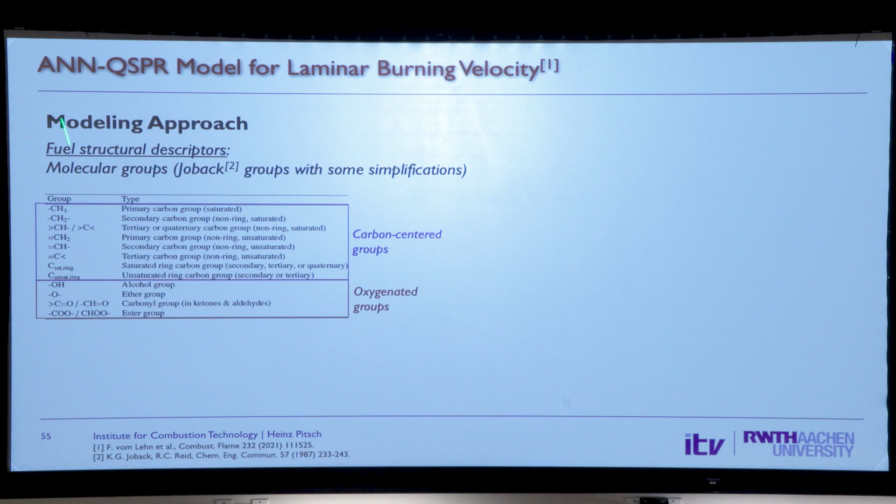There are actually two interesting aspects here. First, we do structural grouping again, using similar structural groups, shown here for anisole, how the structural groups look like. Then we define a network, which is relatively simple.

So what we do is take chemical mechanisms for fuels where we think the mechanism is very good, where we have some high pressure data, and we validate the mechanism. Then we compute 3,400 data points for different temperature, pressure, and equivalence ratio for these two fuels. That brings in training data that provides the pressure and temperature dependence the individual functional groups should have. That's trick number one: combining experiment and simulation.

The first approach could be to just randomly pick points from this database, and that's what the student did. Train the model, and the problem is the training has seen only 70% of the points, but it has seen all pressures, all fuels, and all temperatures at some point. That means the validation data might look pretty good, but if I apply this to a pressure, temperature, or even a fuel I haven't seen, it might be totally wrong, because it was never trained to predict something it hasn't seen at least a few data points of.

So we do different trainings here. One is everything random, another uses k-fold cross-validation but the data we leave out is not random, we leave out a complete temperature and pressure, all the data for that pressure is taken out. Then we do a third one where we leave out a fuel entirely. We have 10 different fuels, and in training we leave one fuel completely out, then use that fuel for validation, testing whether the network can predict a fuel outside of the network.

So if we do that, here's the result for everything random, here for leave-out pressure and temperature, and here for leave-out an entire fuel. You see that if you apply this to a different fuel the network has never seen, it's still not so bad, but you do get larger errors.